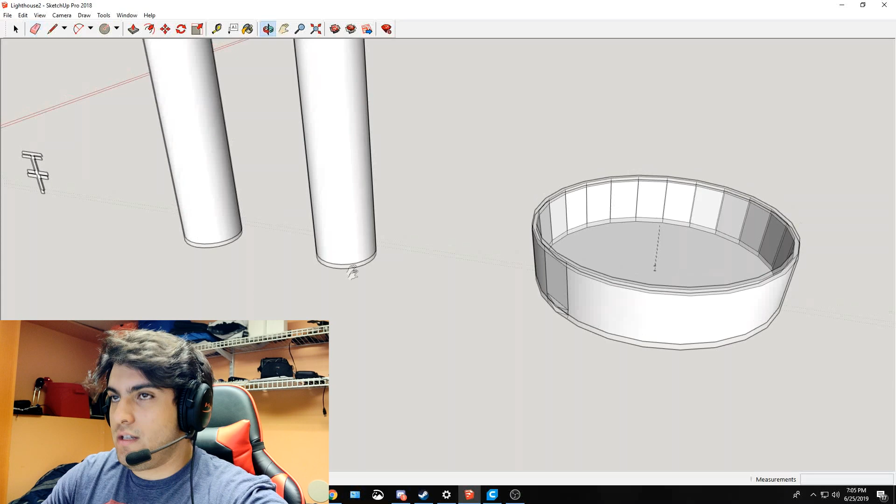I've laid out all the parts in one straight line so we can get an idea of what exactly we're working with. Here's the first part we're printing, and it's actually upside down. As you can see, I have a face here, done so the music box mechanism can be bolted up underneath that - it would look something like this underneath the face.

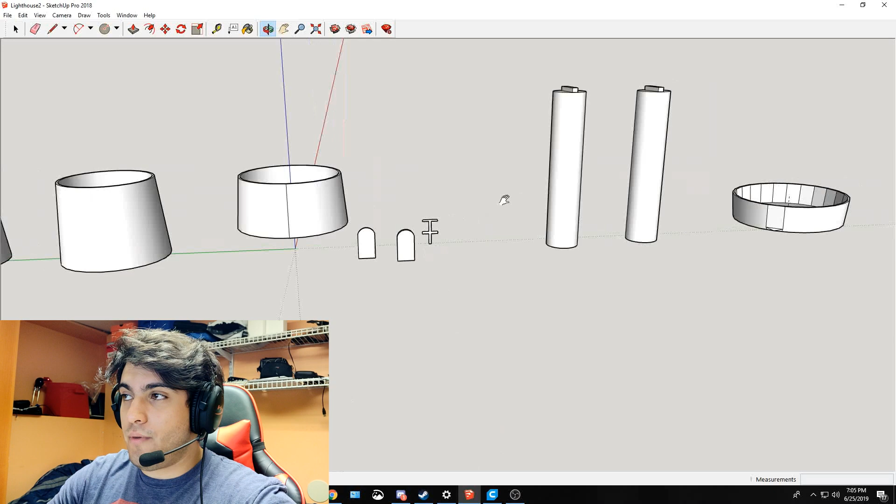Then if we turn this back over, we can go to the major parts. We have the part that goes on top of the part currently printing - this is the part that is currently printing, by the way. Then we're going to have to print this part, which goes on top of it.

It's basically just a continuation, a segmented cylinder I guess you can say. And then these are the following pieces that go one on top of the other.

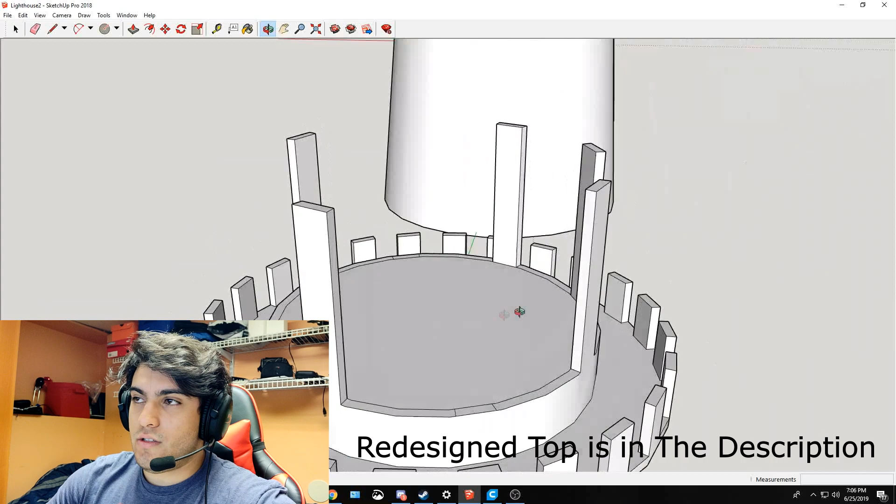Then here is the top portion of the lighthouse, which is where the lights will go. I have a few options here - as you can see, I've lowered a few of these pegs.

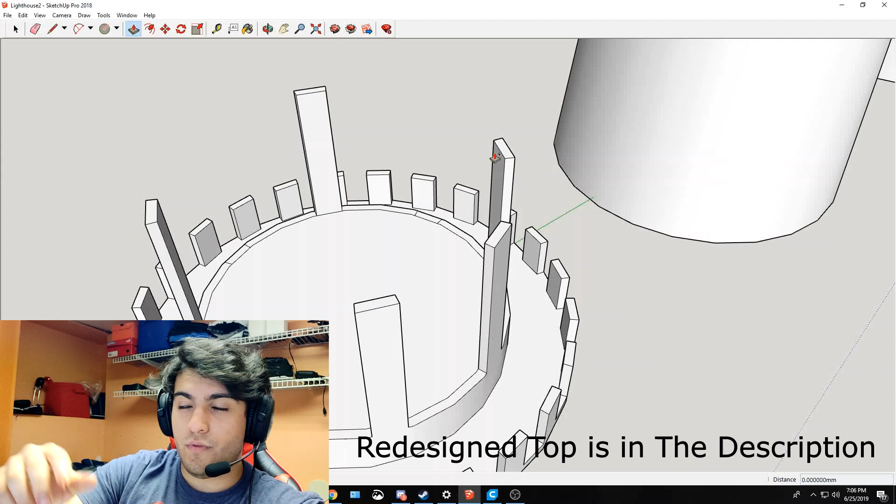That's because I have a light here, which I'm not sure if I'll be using exactly or maybe something else. But if I do use this light exactly, I've measured it out that to fit inside, I'd have to remove those pegs, so we can discuss that when we get there.

But yeah, so here's the light, and then we have our little roof portion. As you can see, it's just a cone, and that would just sit on top of these pegs here.

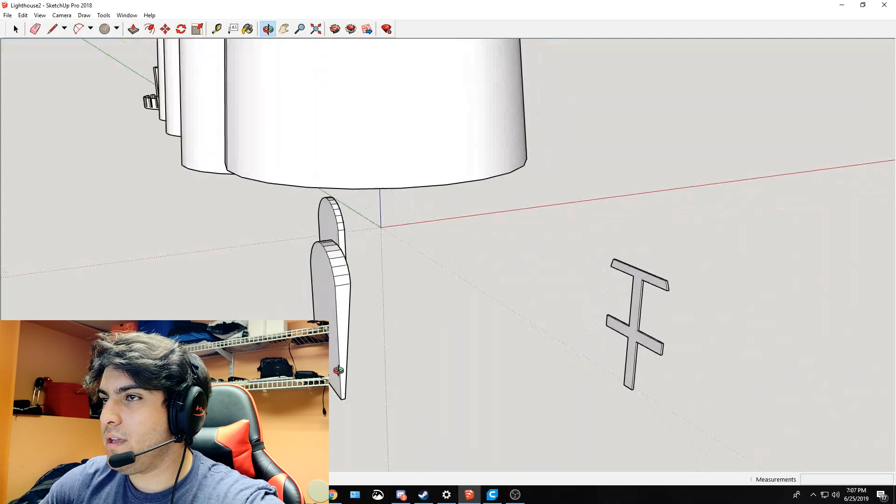So as we move a little bit down, we have some less important parts that may or may not be printed - these are like windows or doors. We'll probably do these in black. Then here would go on one of these to represent like a window.

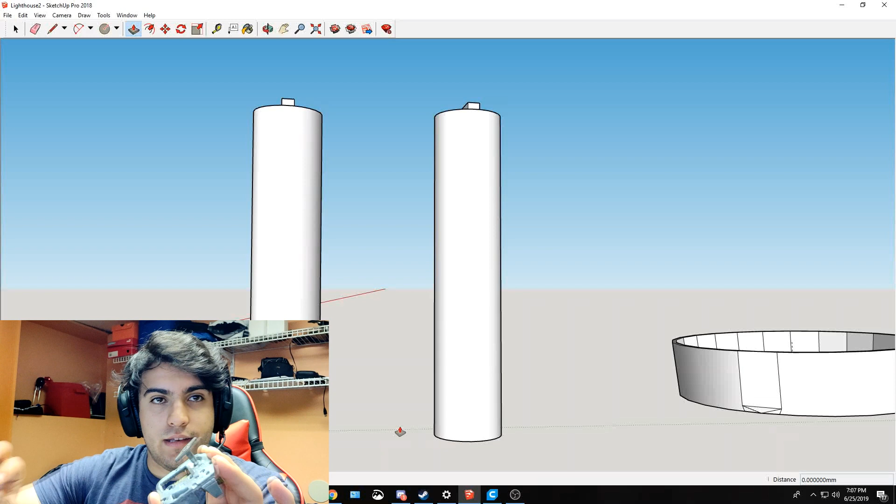This here may be done on the 3D printer or could just be done out of any other material I have laying around. This is basically an extension to extend the winding knob of the music box mechanism, so this would attach straight on top, sending it all the way up to the top of the lighthouse, so you can wind at the top and also wind up this section.

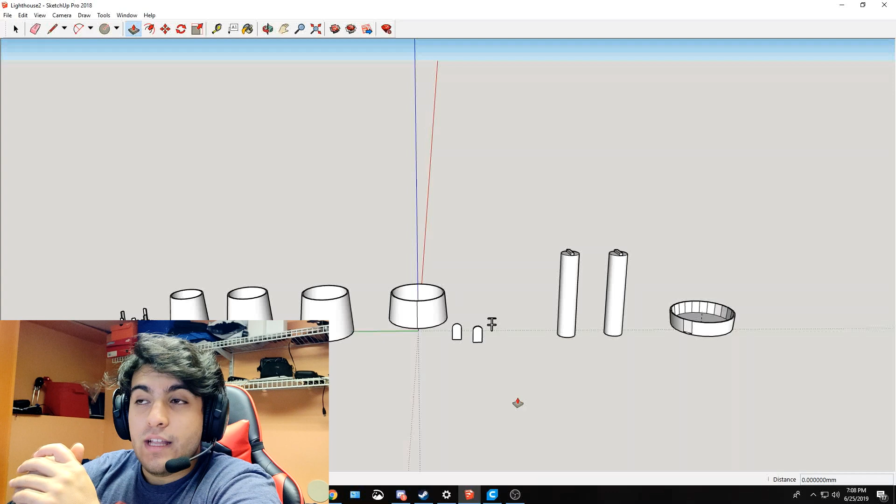Alright, so those are all the parts, and we've gone through each of them. Now it's just a matter of feeding the printer, and these parts take around 5 to 8 hours each. So it's going to be quite a long print, but it should be fun. Let's head over to the printer and see how the first piece is coming out.

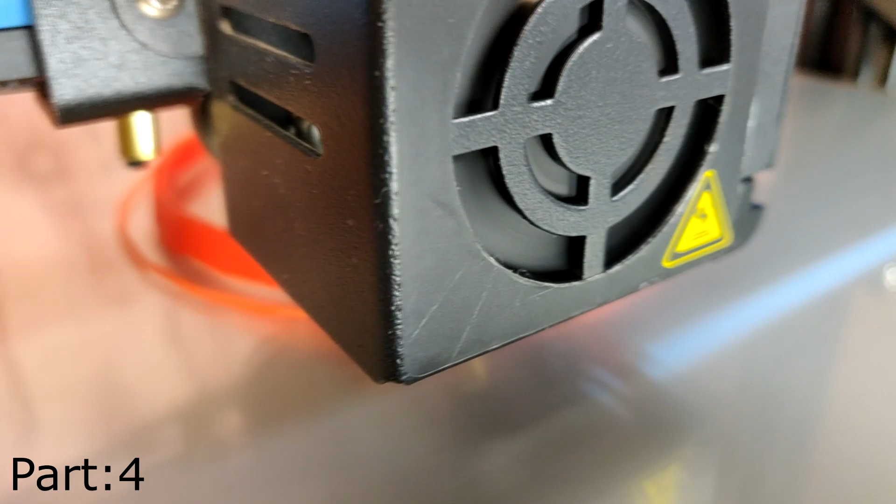Sorry to interrupt, I just wanted to bring to attention what exactly is going to be shown in this next clip. The bottom portion of this piece was printed at a much faster rate than I normally print at. I normally print at 80% speed, which I believe to be my sweet spot, and you'll see the difference between the bottom portion of this piece and the top. The top was printed at 80%, yet the bottom was printed a little bit faster.

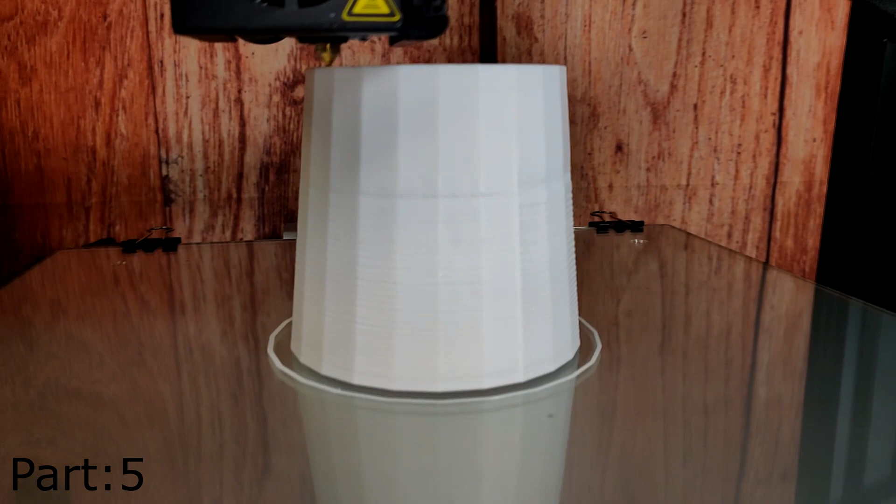This is an example of what under extrusion is. So if you are experiencing results like this on your printer and getting lackluster prints, perhaps a quick and easy fix could be trying to lower the speed, and perhaps you'll get higher quality prints. Thank you.

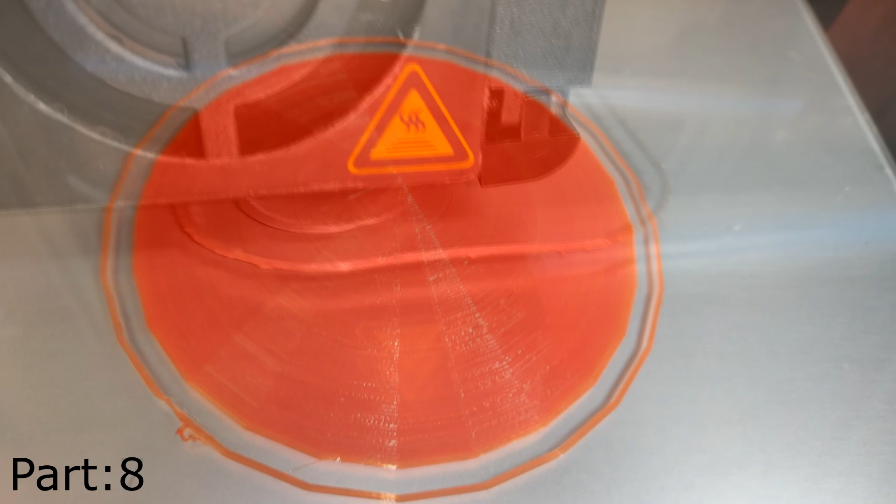Alright, so as you can see, all of our pieces for this print have finally finished printing. We have the consecutive pieces for the body of the lighthouse, the top piece, the little roof, and some little windows or doors that I've printed - a few different designs we can try out.

And this piece right here is simply just a flat plate. It was actually the beginning of the roof that I stopped early, so I could have just a sheet of plastic to work with - you can make this out of anything. I just melted a hole straight through it, and this will be the topmost piece of our lighthouse, acting as a guide for the shaft that will run down through the body.

The shaft we're using to extend the winding mechanism up to the top of the lighthouse is an assortment of pen tubes. I tried to pick something most people would have in their house, so I have one Bic pen in the middle and two Paper Mates at the ends, and as you can see, they just fit into each other like so. Then I have the cap of the Bic pen on top, which will be used to attach to the top piece of the lighthouse.

At the bottom here is another version of this winding handle that comes on most music boxes - this came from a toy, so if you have a winding music box toy, it might have this piece as well, making it much easier to use. However, you can still use the original winding handle and you should be just fine. I've also gotten some super glue and hot glue, so whatever adhesive we need, we have it, and we can start the build. So let's get to it.

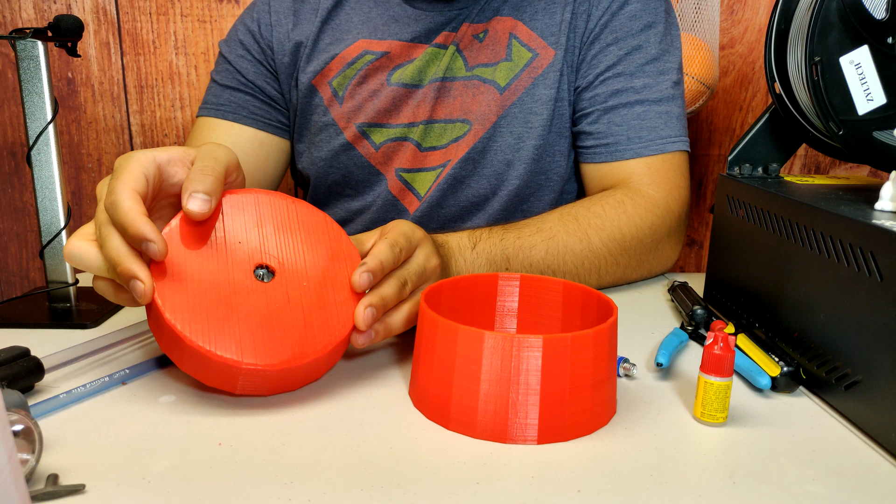As you can see, in the first piece of the print I've melted a hole, allowing for the music box hardware to come through. And here's a music box - any way you attach this music box will be fine, as long as the shaft comes through the center of the circle. Now we can begin by attaching this second piece on top of the first piece, like so.

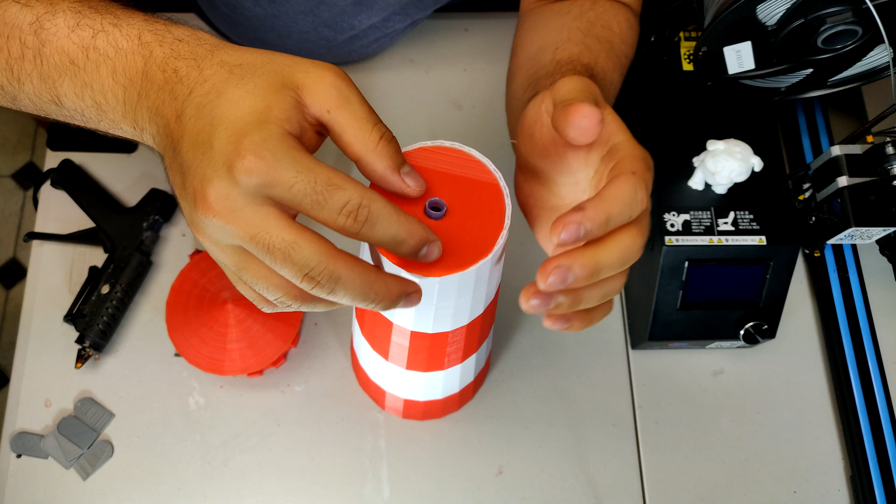And simply place it right on the top, like so.

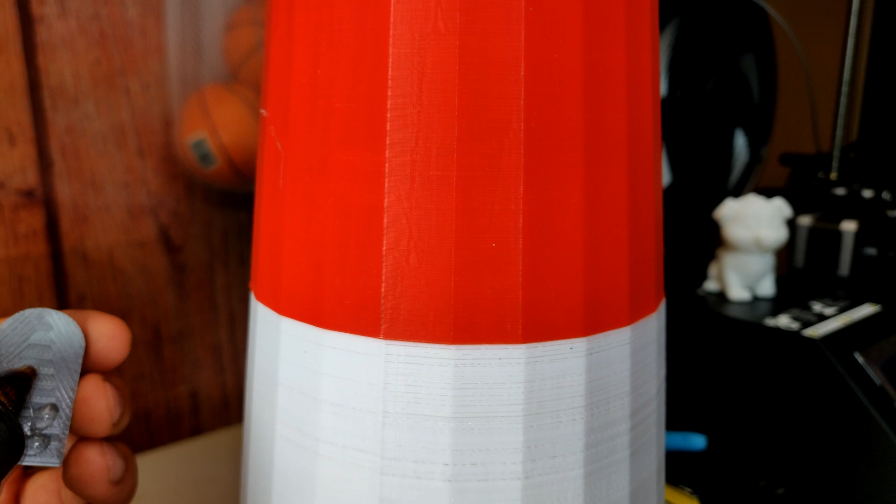And there we have it, ladies and gentlemen, our finished 3D printed lighthouse. But a lighthouse wouldn't be much of a lighthouse without the spinning light at the top.

So let's go ahead and hit the lights. Wind her up. And we can go ahead and turn on the light.